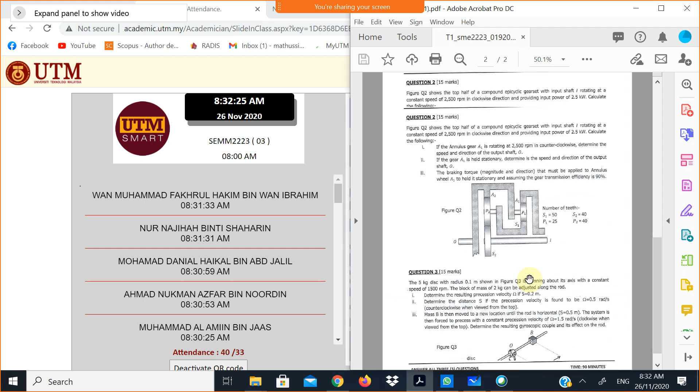So we have 3 questions. First question is about gear system for hoisting lift. Question number 2 is about gear system for epicyclic, and question number 3 is about gyroscope. Okay, boleh kita start? Boleh?

Okay, dah buat belum soalan ni? Ada yang dah buat? Okay, kita tengok this question. Kalau siapa yang tak buat lagi, belum okay. So, kita tengok this one. Macam ni kita nak solve.

For question number 1, an engine is driving two drums. Tak jelas sangat. Professor, can I ask you a question before we start?

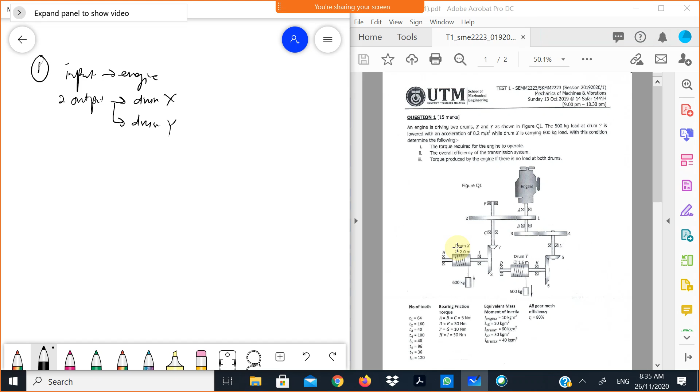All right, so what is our first step? First step is you need to identify how many input and how many output, isn't it? So for this case, we have one input, which is engine. All right, our input is engine, and we have two output, okay, first is drum X and another one is drum Y. Okay, so from 1 to 2, and then next is we need to find gear ratio, isn't it? Gear ratio.

So what is our gear ratio? We have N12, okay, N12 equals to T1 over T2, isn't it? T1 over T2, which is 64 divided by 160, which is 0.4. Okay, and then we have N34, which is 40 divided by 100, which is 0.4 as well. And we also have N56. N56 is 48 divided by 96, 0.5. Okay, and last one we have N78. N78 equals to 36 divided by 120, which is 0.3. So this is our gear ratio.

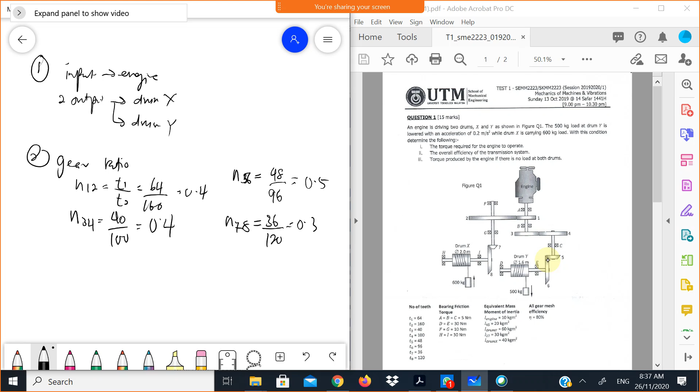Okay, what happen if, for example, we have... kat mana saya nak buat ni? Okay, kalau contoh if during exam, if we have this one is radially, maksudnya for example, if we have this one, okay, our gear one is like this, okay, and then we are not given T3. So how to find 3? For example, we are not given T3, and T1 is, we have T1, we have T2, and we have T4. Okay, and then we are not given T3. So for this case, basically kita boleh guna kaedah apa?

We can find using what we call reverted gear train, isn't it? Reverted gear train maksudnya we have the same radius. We have the same, which means that radius for input, alright. For example, macam ni saya lukis okay.

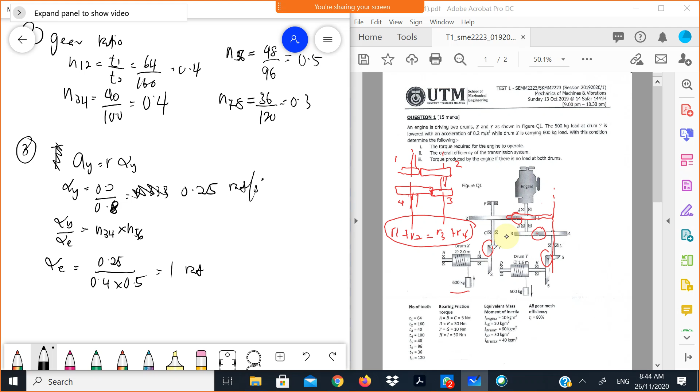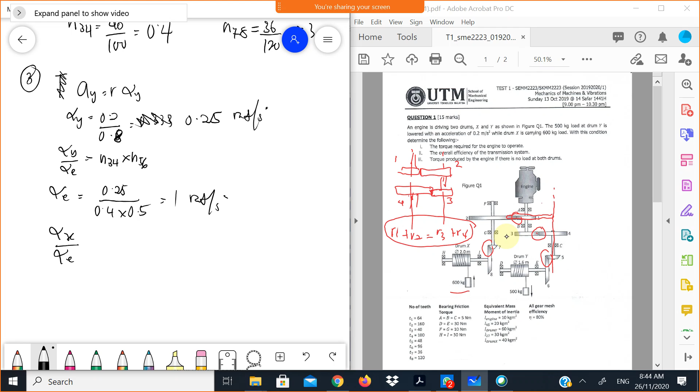Betul? Radian per second square. So this is our alpha engine. Then once we get alpha engine, then we can find alpha X, drum X, isn't it? So drum X divided by drum engine, so alpha engine equals to N12 times with N78. Okay, so alpha X must be N12 is 0.4, N78 is 0.3. So 0.4 times 0.3 times 1. So alpha X must be 0.4, 0.3, 0.12. So this is our alpha X.

This is our alpha engine, and this is our alpha Y. Okay, so kita dah dapat semua alpha. We get all alpha here. So from here, we move to step number 4.

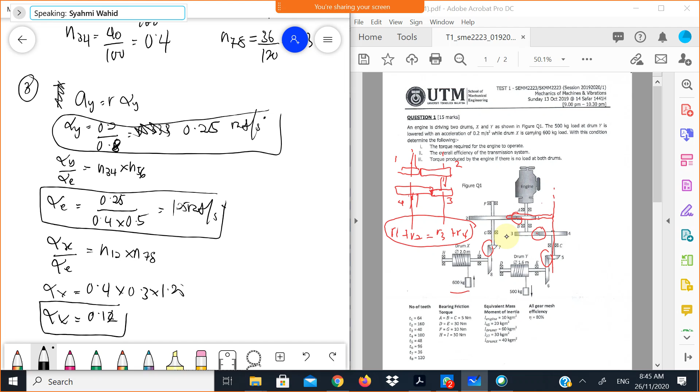Alpha E bukan 1.25 ke? Alpha E. Salah. Sekejap fikir. 0.25 bahagi 0.4 darab 0.5. Betul lah. 1.25. Then kat sini berapa? 0.15. Okay, good. Betul. 0.15.

Okay, so basically from here we can find A, isn't it? AX. Kita boleh dapatkan terus lah untuk kita masukkan dalam kinetic analysis kejap lagi. So we can actually find AX. So what is our AX? R alpha X. So R is 1, isn't it? 1 times 0.15. So we get AX equals to 0.15 meter per second squared. So this is our AX.

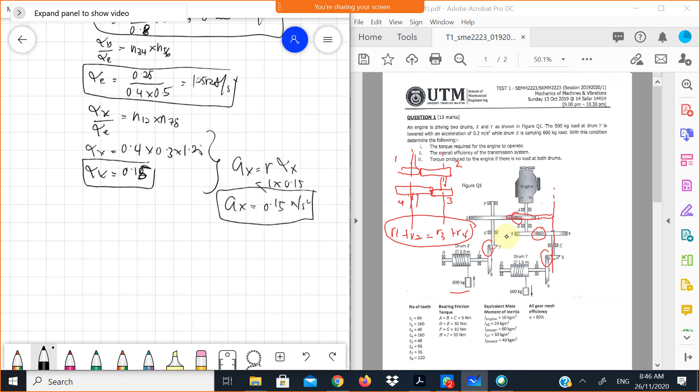So that is our step number 3. Step number 4.

Step number 4. We need to find what? We generate our equation: torque engine or torque input equals to torque friction referring to input, plus torque inertia referring to input, plus torque X referring to input, plus torque Y referring to input.

So we focus on torque friction first. What is our torque friction referring to input? What is our equation? We have bearing friction A plus B. We start with A plus B, plus friction going through gear ratio 1,2. Then we have F plus G times with gear ratio N12 over efficiency 12. And then we also have I plus H, and then again we have N12 over efficiency 12 times with N78 over efficiency 78.

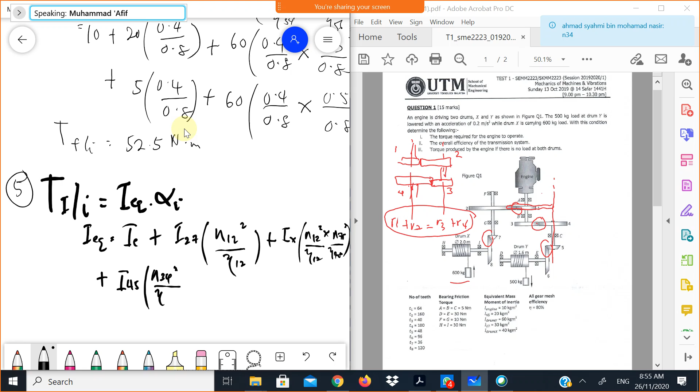Plus what else? We have I45 times with N34 squared over efficiency 34. And then plus with IY, with N34 squared over efficiency 34 times with N56. Okay, correct. And then what is our I equivalent?

Just input all the values. So we have 10 plus 30 times with N12. What is our N12? 0.4, so 0.4 squared over 0.8, plus Ix. What is our Ix? 40, times 0.4 squared over 0.8, plus N78 which is 0.3, over 0.8.

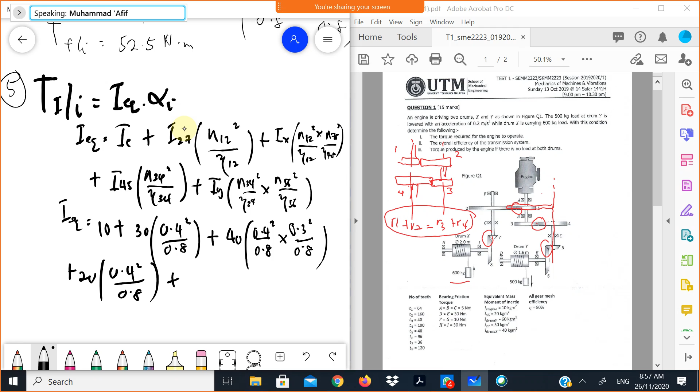I equivalent. 24.65, correct?

24.65. So we have 24.65, and from here we can find our torque inertia referring to input, which is 24.65 times with alpha input. What is our alpha input? Alpha engine is 1.25. So we have 1.25. So what is our answer? 30.8 Newton meter. That is our answer.

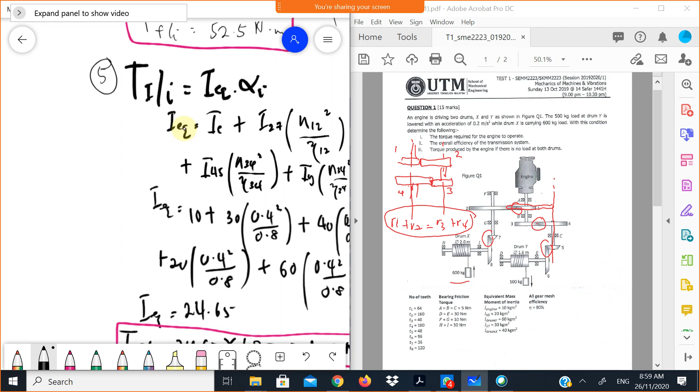Answer for torque inertia, we already got this earlier, and this is our torque friction. Next we need to find step number 6, where we need to find torque drum X.

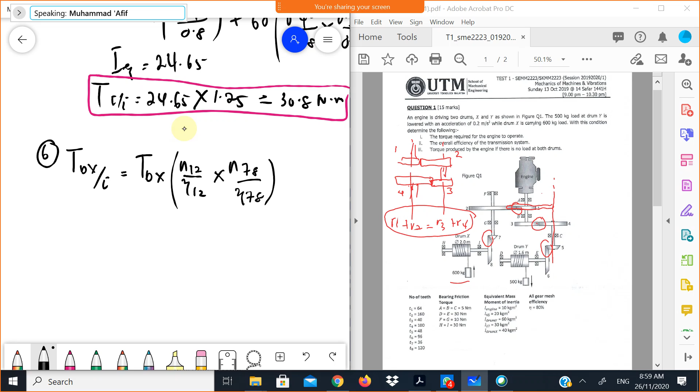Referring to input. So we have torque drum X times with N12 over efficiency 12 times with N78 over efficiency 78.

So what is our torque drum TDX? We need to find TDX first. So how to find TDX? Basically we need to find it based on kinetic analysis. So what we have, or let's just do this directly.

What was our N12 again? N12 is 0.4 divided by 0.8, times with 0.3 over 0.8, times TDX. So what's our answer?

0.1875 TDX, so TDX referring to input must be 0.1875 TDX. So we need to find TDX. How to find TDX? So basically from the figure, we need to analyze our load here.

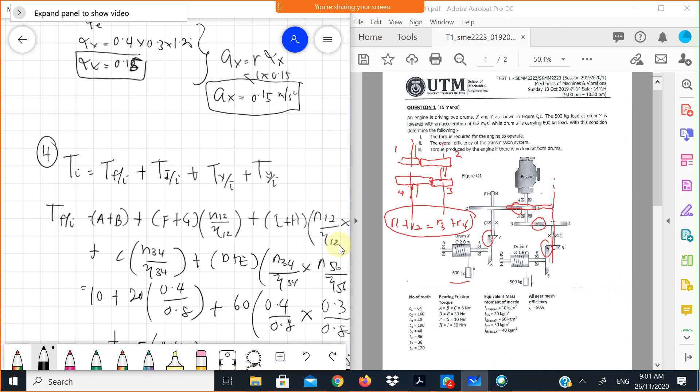So 0.15. So this is our kinetic analysis. This is FBD. So this is KD, sorry KD. So what we have? Let's say positive is upward. So we have Fy minus 600 times 9.81 equals to 600 times 0.15. So what's our Fy? Fy ke Fx?

Silap, Fx. Should be Fx minus. So Fx equals to berapa? 5976, betul? 5976 Newton. Then once we get our Fx, from here we can find torque DX, which is Fx times with radius, so 5976 times with radius is 1. So then torque should be 5976 Newton meter.

So from here, once we get our torque, then just input kat sini lah. So we have torque drum reference to input must be 0.1875 times with 5976. So the answer must be 1120.5.

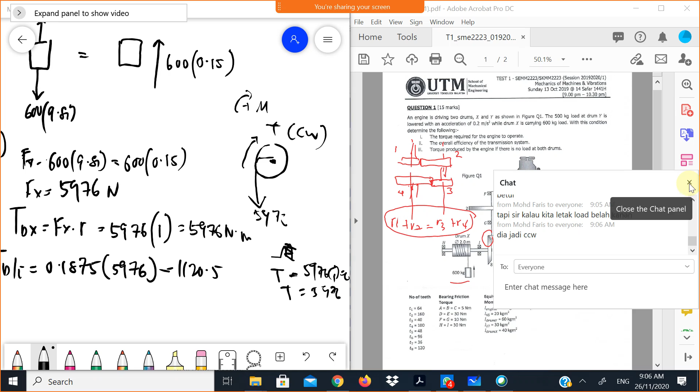Tak dengar. Apa ya? Kalau kita letak load belah kanan, dia akan jadi counterclockwise. Bila kita letak load belah kanan, dia punya pergerakan torque must be ke sini. Dia tak akan jadi sama arah dengan load, dia akan opposite. Okay? Clear? So torque must be 5976 Newton meter. Okay? Alright, so this is our torque

DX, reference to input. Then next is we need to find torque DY, reference to input, which is torque DY times with n34 efficiency, times with n56 efficiency. So what we have? N34 is 0.4 over 0.8, times with N56 is 0.5, 0.8 torque DY. Okay.

0.4 darab 0.5 bahagi 0.8 square, 0.3125. 0.3125 T dy. So this is our torque dy, reference to input. Then we need to find T dy. How to find T dy?

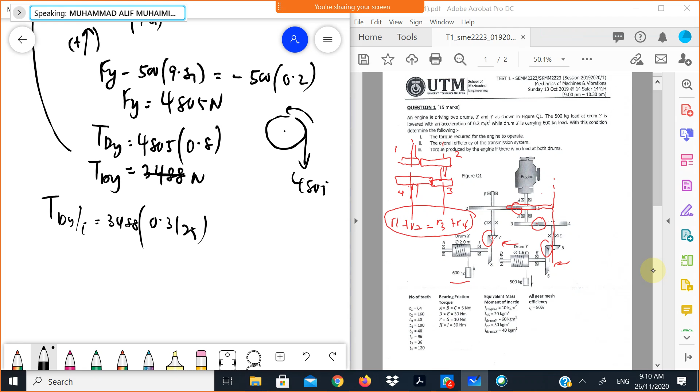Okay, once we get TDY, back to our equation here, we can find our TDY referring to input. 3488 times with 0.3125... 3844, sorry.

So the answer torque DY referring to input, berapa? Darab dengan 3844 darab 0.3125, 1201. 1201, betul? 1201.3 Newton meter. So that is our torque dy reference to input. Is that correct?

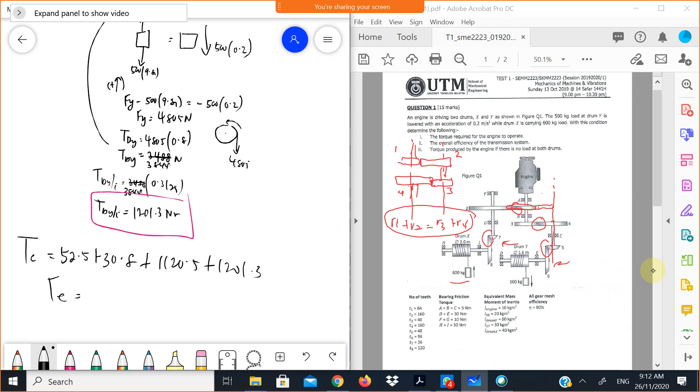Then next, once we have everything, we put it into our main equation. So torque engine or torque input must equal to torque friction, which we got earlier. 52.5, 30.8. So 52.5 plus 30.8 plus with 1120.5 plus 1201.3. So our torque engine equals to 2405. Betul? 2405 Newton meter.

So this is our answer. Any question? This is question one, torque required for the engine to operate. Any question, nak tanya? Tak ada? Semua dah faham?

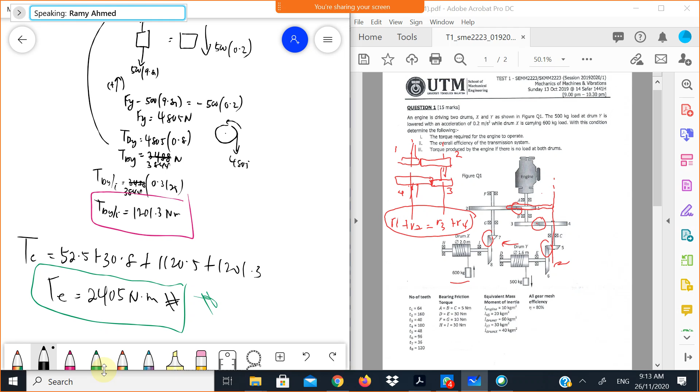Okay, next we need to find overall efficiency of the transmission system. So what's our overall efficiency? Question number 2 kat sini.

So we know that our efficiency overall should be power output divided by power input. So power output we have two, drum X plus drum Y over power input. Then we know that torque drum X over omega dx plus torque drum Y omega drum Y divided by torque engine omega engine. So this is our equation. Then breaking it down, we get our torque dx over torque engine equals omega dx over omega engine plus torque dy over torque engine, omega dy over omega engine.

So we know that this is actually gear ratio from X output to input, drum X to engine. So TDX, what is our TDX? We already got it earlier. TDX is 5976, betul? Okay, 5976.

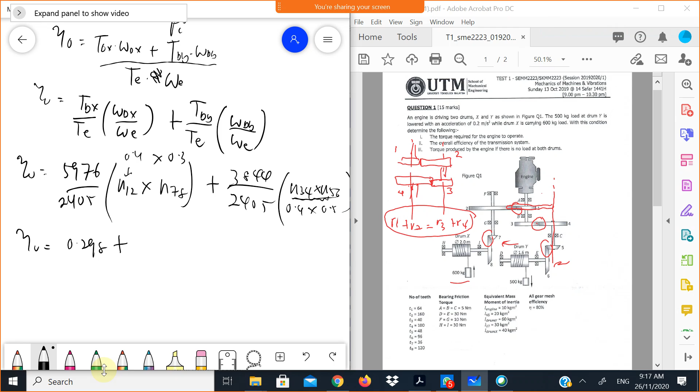So our overall efficiency berapa? Cuba kira, what's our overall efficiency? 5976 bahagi 2405 darab 0.4 darab 0.3, this should be 0.298 plus 3844 bahagi 2405 darab dengan 0.4 darab 0.5, so 0.3197. Times 100 should be 61.8%. So this is our overall efficiency.

Okay, clear? Any question so far? Okay, question number 3, it says torque produced by the engine if there is no load at both drums. What does that mean here? If no load at both drums.

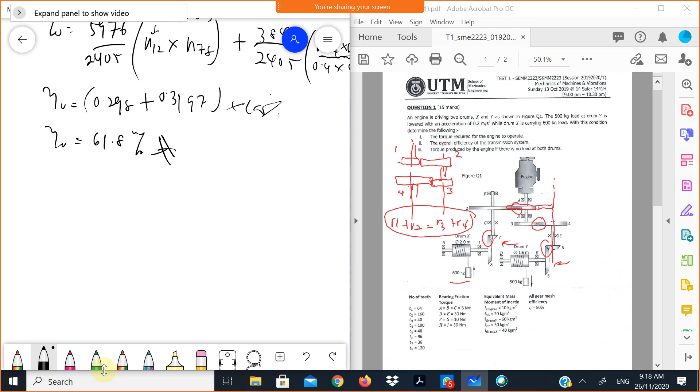So meaning to say that we have no torque output. So we have no torque drum X and we also have no torque drum Y. So we just only have torque due to friction and torque due to inertia. So we just tambah the two without considering torque output, we just only have inertia and also friction. Okay, so number 3 should be what answer?

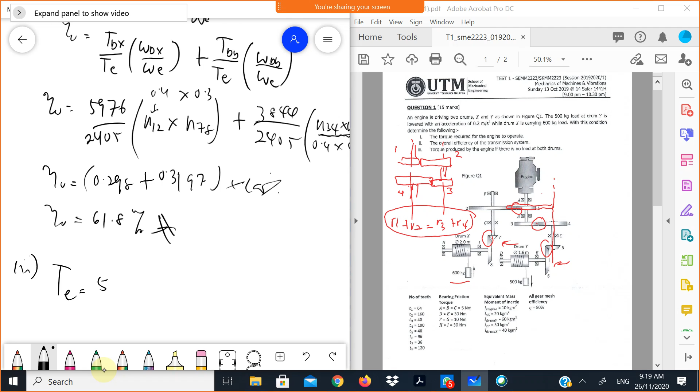Torque engine should be 50 campur dengan 52.5, 52.5 plus 30.8. So this is our answer, 83.3. Okay, done. Any question nak tanya? Satu soalan dekat sejam.

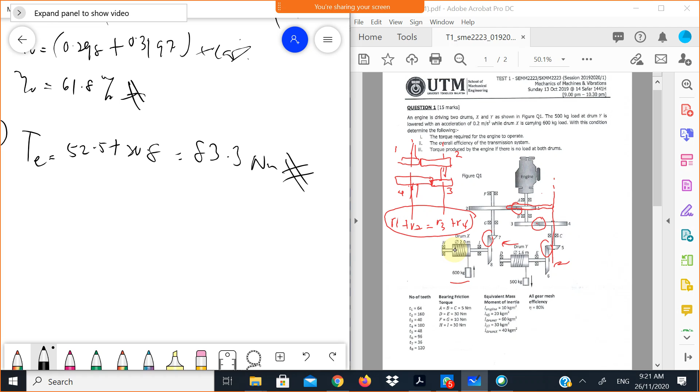For each question, look at this. Let's say for example, during the exam, we take drum Y over here. What happens if we have another drum, or let's call it drum X. For example, if we have another drum attached to this, and then it goes further, or it goes here, and then we have another drum here.

So how many outputs do we have here? Let's say this is 8, 9, 10. So how many outputs? We have 3, isn't it? We have 3 outputs. Same thing if we need to find the torque output for, let's say this is Z, drum Z.

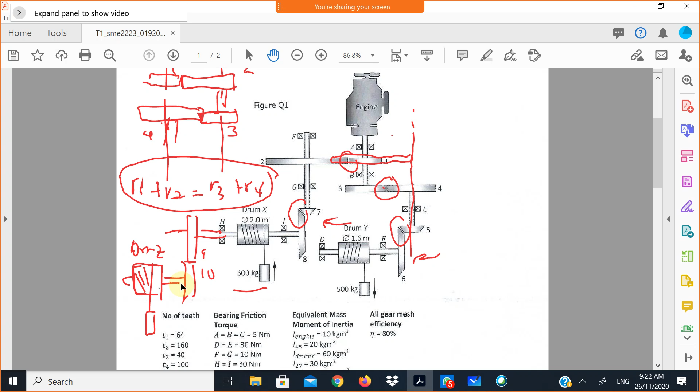So if we need to find torque drum Z referring to input, as usual we need to start from the beginning. It will go through 1, 2, 7, 8 and 9, 10. For drum X, just only 1, 2, 7, 8 for top drum Z. So how about top drum Z, referring to input?

So what is our equation? It should be: torque drum Z must be N1,2 times efficiency 1,2 times N7,8 times efficiency 7,8 times N9,10 times efficiency 9,10. Same thing, meaning it passes through 3 gear ratios. For drum X, it's just TDX equals N1,2 times efficiency 1,2 times N7,8 times efficiency 7,8. That's it.

For drum Y it's the same, it will pass through 3, 4 and 5, 6. Okay, clear? Any questions?

Professor, for the reference from the output, if I take the reference from the output... If my torque is referenced to the output, not to the input. Referring to the output, yes. For this case, you cannot refer to the output because we have all 3 outputs. I know, yes, so what do you mean? In case it's referring to the output, then basically you can have the same, but the equation will be different.

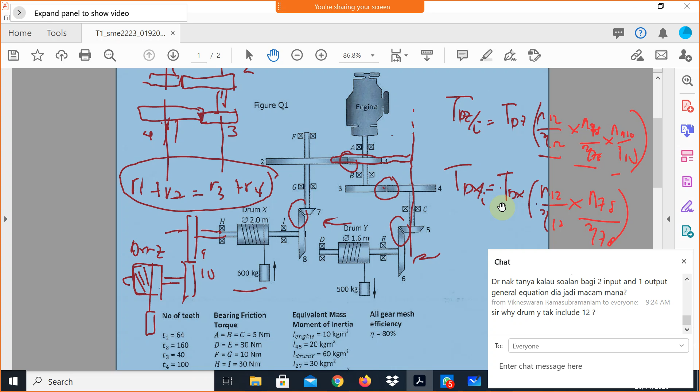The equation will be different. You need to, if you're referring to the output, for example, find TDX reference to output. Alright, reference to output, meaning your TDX should be opposite. So your efficiency should be upward: η1,2 or 7,8, or 7,8.

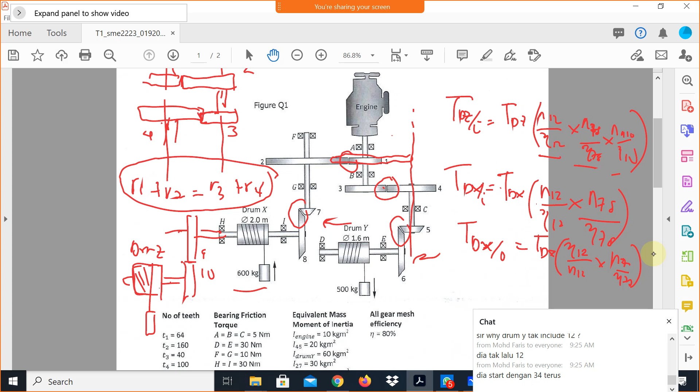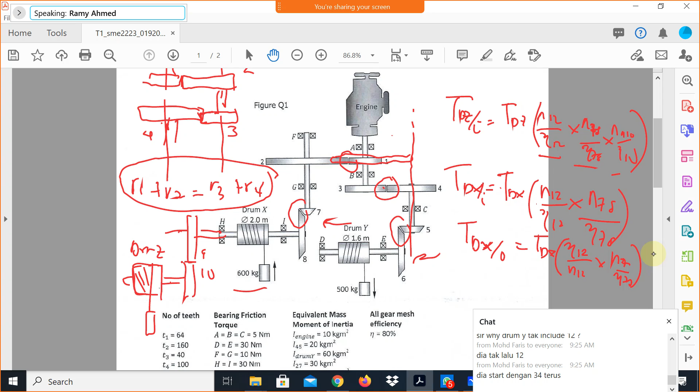But I don't recommend referring to the output because you might get quite confused if you focus on referring to the output. That's why in my lecture I just focus on referring to input, so I can focus on one method only. It's easier, no need to focus on referring to the output. Thank you very much.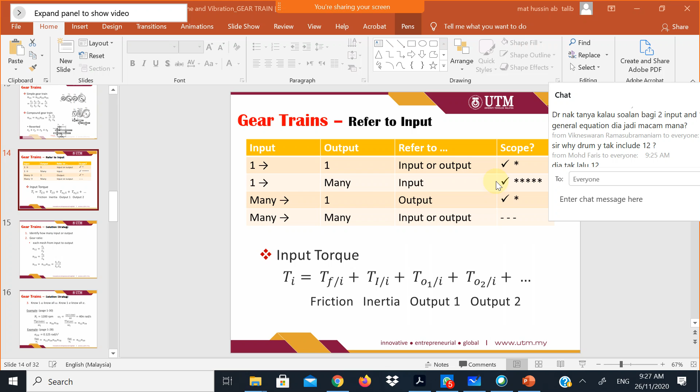So if we have 1 input and then many output, what does it mean to have 2 input and 1 output? 2 input, many input and 1 output, same thing, so the equation will just be reversed. Okay, so for example this one, if we look at this, our reference means our input is torque. So here, if we refer to torque output, for this case we have 2 input and 1 output, isn't it, here.

So same thing, our torque output will be: torque output must equal torque friction referring to output plus top inertia referring to output plus top input 1 referring to output plus top input 2 referring to output. So what's our torque friction? Torque friction referring to output must be reversed, so A plus B plus C. Let's say we have efficiency 1,2 over N1,2, it will be reversed, okay?

Because we are referring to output, plus D, for example, N3,4 divided by efficiency 3,4. Same also for the case of inertia, referring to input.

So we start with I output, plus our input too. No, we need to start with I output plus, for example I 3,4, and then this one must be efficiency 1,2, efficiency 3,4, and 3,4 squared. It's inverted.

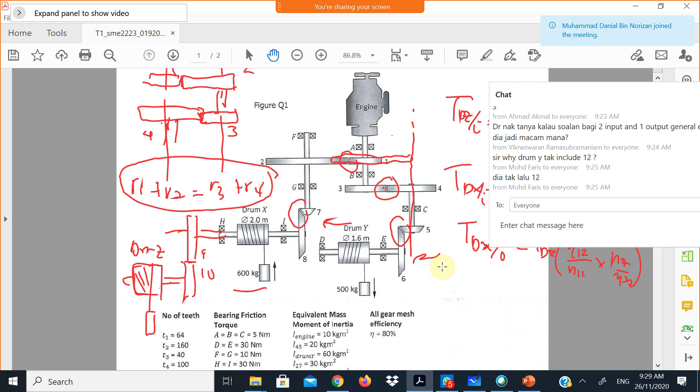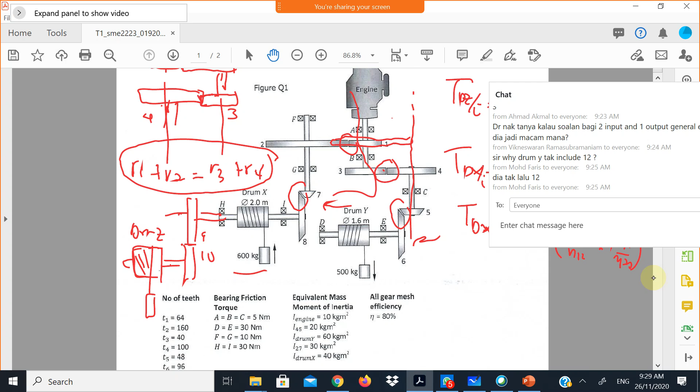Gear 1,2, sir, sorry. It doesn't pass through, so gear 1,2. Okay, for drum Y, the area covered for drum Y is only here. Okay, this is for drum Y, this is for drum X.

Okay, so if we look at drum Y, the only gear ratio involved is 3,4 and 5,6. 1,2 is only for X. Okay, clear? 1,2 only for X.

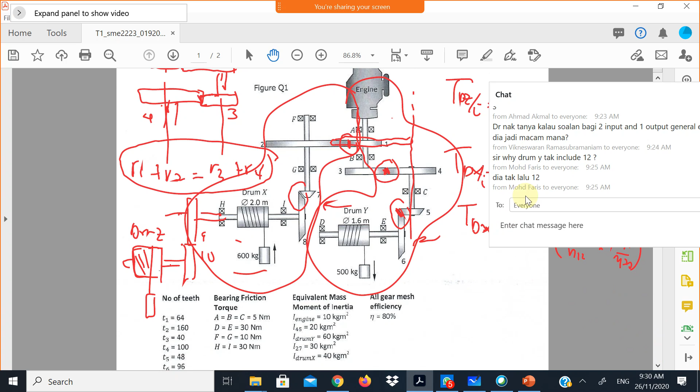Okay, question number 2, this one is a bit tricky. Question number 2 is the same too, if you understand it there's no problem to generate your table. That's why I told you, you need to hold on to the main rule of epicyclic.

What is that? You must know that gear for the first set, okay, must be arm for second set. What does this mean here?

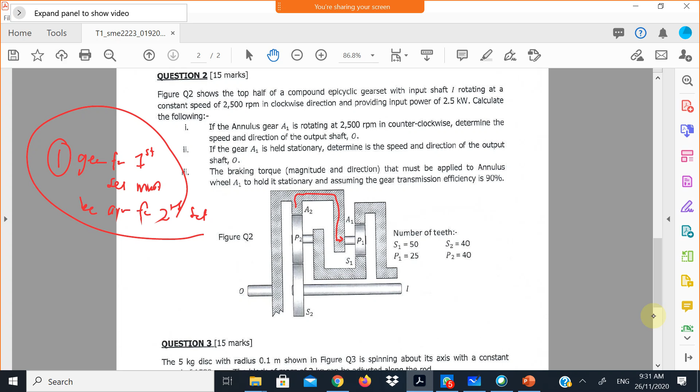It doesn't matter how, for example for this question, which set should we start first? Either the set on the right or left side, set number 1 or set A2 or set A1. Okay look at this one, to fulfill this rule, where does it fulfill this rule? We know right, here both. So A2 is connected with arm 1, isn't it? This is our arm 1, and also S1 is connected with arm 2. So both can work, you can start either from the right side or the left side.

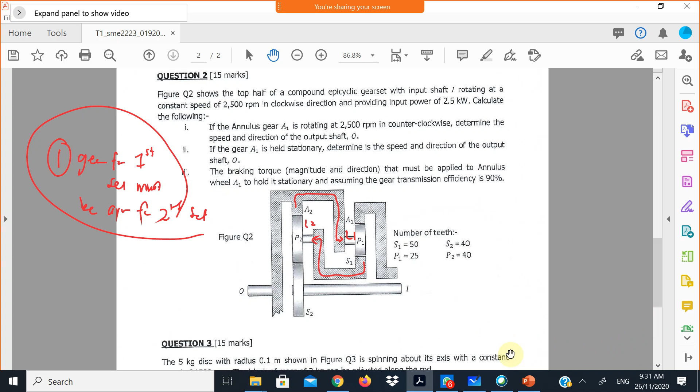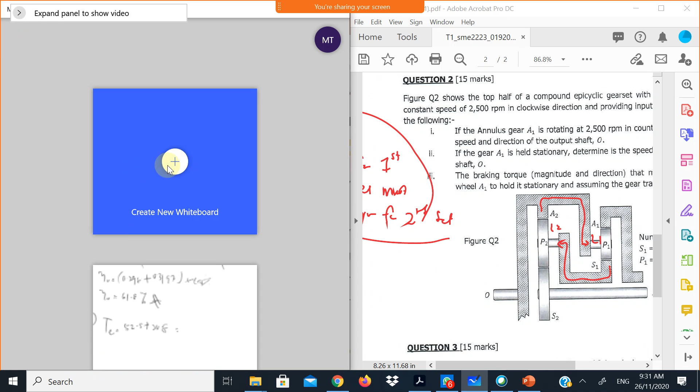For example, if you start from the right side, okay, for example if we start with table positive 1, negative 1. Okay, look at the question first: calculate gear A1, determine speed direction, if gear A1 is held stationary.

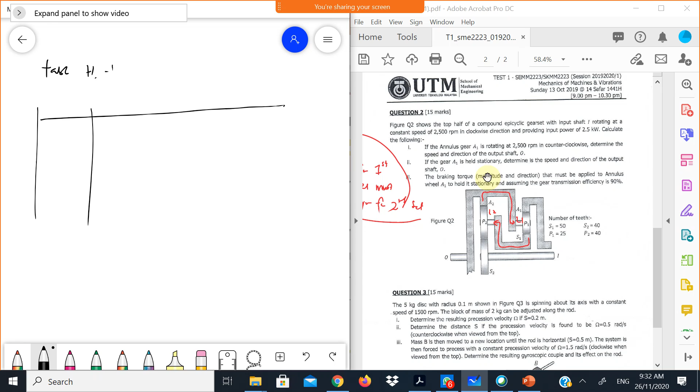Okay, so how do we make the table? First you need to put this. So this is the operation. Okay, for example let's look at this, if I take the right side, if we take our reference from the right side, so what we have is L1, A1 and S1.

So first we give all gears positive 1. So positive 1, positive 1, positive 1. Okay, and then we hold arm L1 and then we give, which one do we give, negative 1? Either A1 or S1.

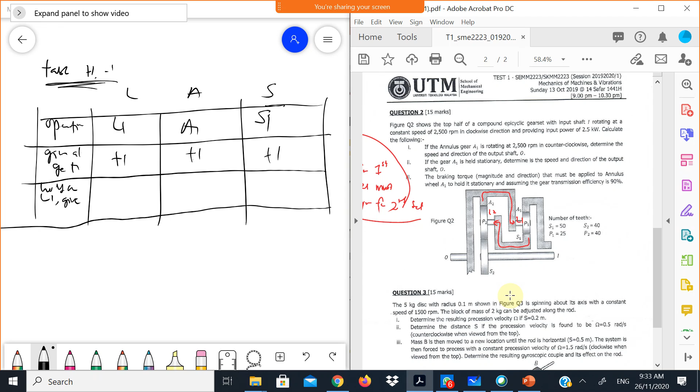No, we will not give A1. Wrong. Because why? Because A1 is here, you must remember the first table we should fulfill this rule. What did I tell you just now here? Gear for first set

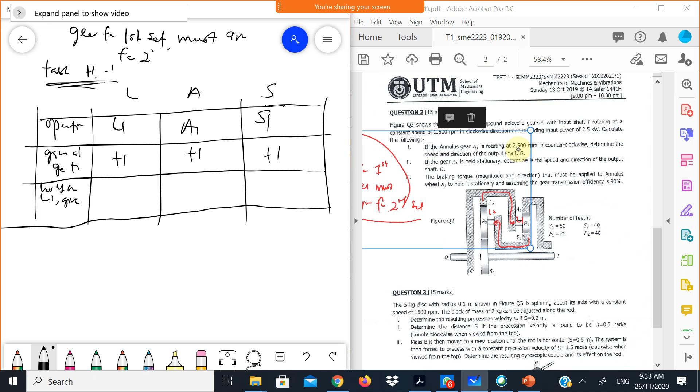must be arm for second set. Okay, gear for first set. So let's say we consider our first set is the right side. Okay, this is first set and this is second set. Okay, correct. So what's our gear for first set? Of course S1, this is our gear for set S1. It must be arm for second set, L2. So we need to ensure that this is 0.

We hold arm and then we give negative 1 to S1, because S1 is the only one connected with L2. Because we need to fix our table 1 first. Okay, so we give negative 1 to S1, and then from here we can actually find the relationship, or we add it up.

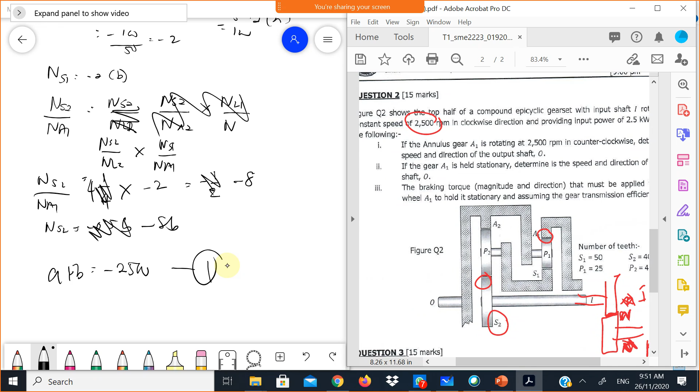Input shaft mana NS2 lah. NS2 dia beritahu clockwise, rotating constant speed to clockwise direction, positive. So NS2 kita from table kat mana input. NS2 sama input maksudnya A minus 2B. Sorry, A minus 8B must be 2500.

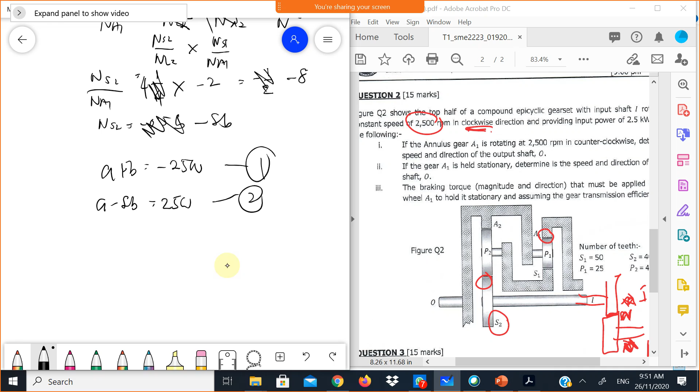So question number 2, okay. So from here, dapatkan nilai A dan B. So from here dapatkan nilai A, dapatkan nilai B. Once you get A and B, then back kepada soalan, dia dapatkan apa?

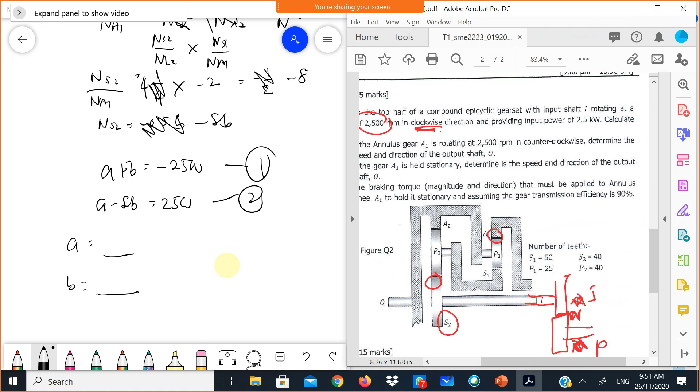Determine the speed and direction of O. O dekat mana? O dia sama dengan A2. Should be same as here. So we need to say that our equation is N-O equals to A lah. Once you get A, so this is our O, this is our N output. Okay, clear?

Contoh soalan B pula. If A1 is held stationary, what does it mean here? Kalau A1 is held stationary, dia sama, so kita akan dapatkan new A and B. So we need to say that for B ni, nombor 2 ni, kita akan buat equation baru. A plus B must be 0. First equation. Another one is A minus 8B equals to 2500. Question number 2, okay. So kita akan dapatkan dia punya new output for B, which is A.

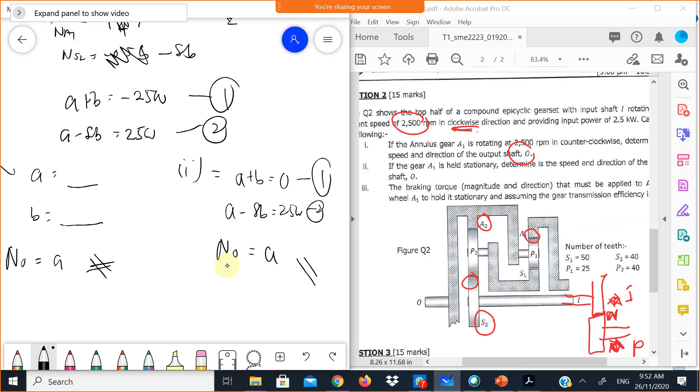Okay, rasa dah habis kot masa. Ada soalan tak? Tak sempat nak bincang soalan 3. Ada soalan nak tanya? So boleh buat, cuba buat, dapatkan jawapan dia lah.

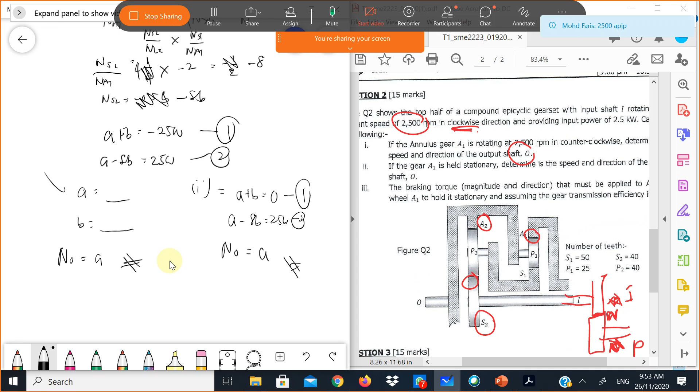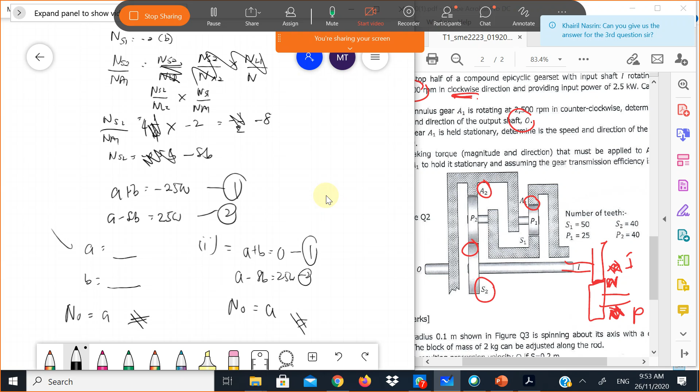Any question nak tanya? So sebenarnya macam itulah konsep dia. Okay, untuk share soalan dan answer scheme kat group, saya tak ada answer scheme kat dia. Okay, saya tak ada answer scheme. Alright, so boleh cuba buat. Nanti saya post video yang saya dah record ni dalam WhatsApp, dalam e-learning, dan boleh tengok balik lah. Alright, saya tak ada jawapan dia. I have no answer, okay, untuk soalan 3.

Video sir, video. Apa? Video soalan 3. Saya kurang sure cara jawab. Soalan 3, saya pun tak tahu jawapan dia berapa. Nanti saya cek balik ada ke tak ada punya answer scheme. Okay, so untuk soalan 3, tak sempat kot, tak sempat nak baca. Just yang what can I say is, cuba study berkaitan dengan gyroscope lah, yang about this topic macam ni. Dan satu lagi, study pasal aeroplane. Alright, so study pasal aeroplane, dan juga kalau ada answer scheme tolong share. Saya tak ada answer scheme. Okay, so nanti saya cuba, kalau ada, saya bagilah. Alright.

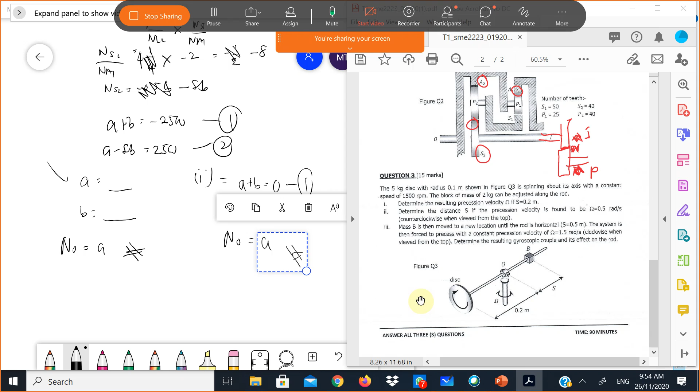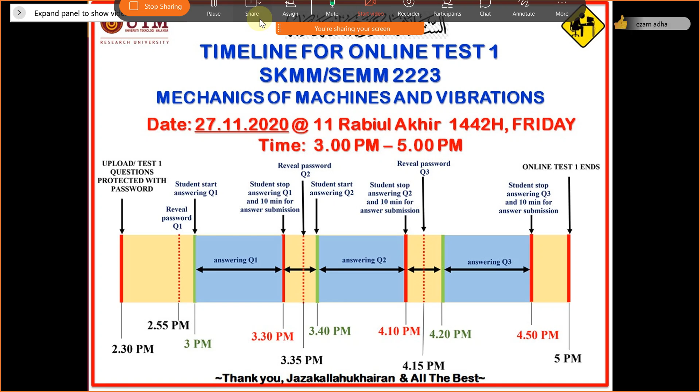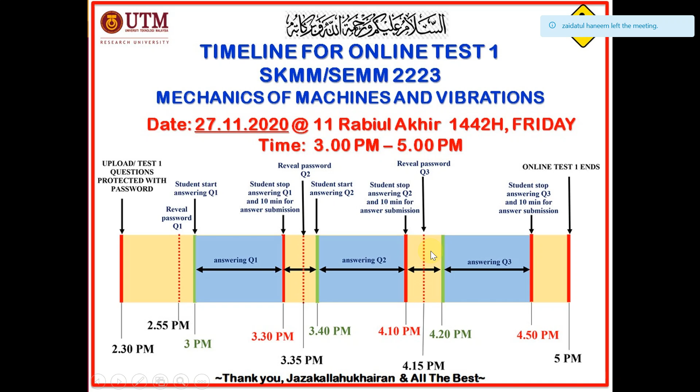Professor, before you finished the lecture, you were speaking about something related to the vehicles? Related to what?